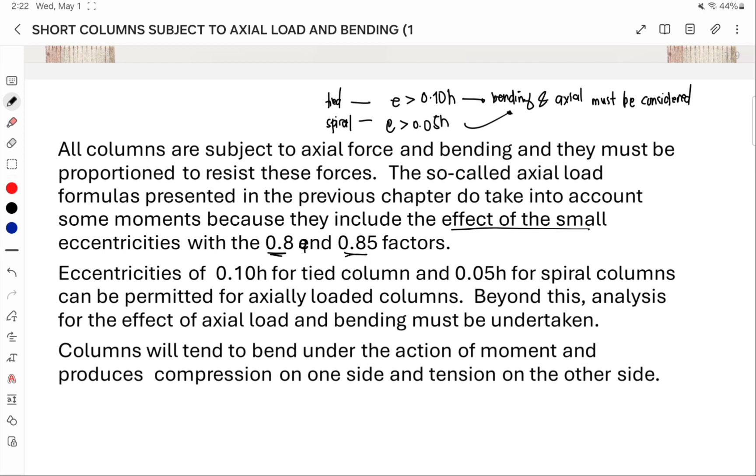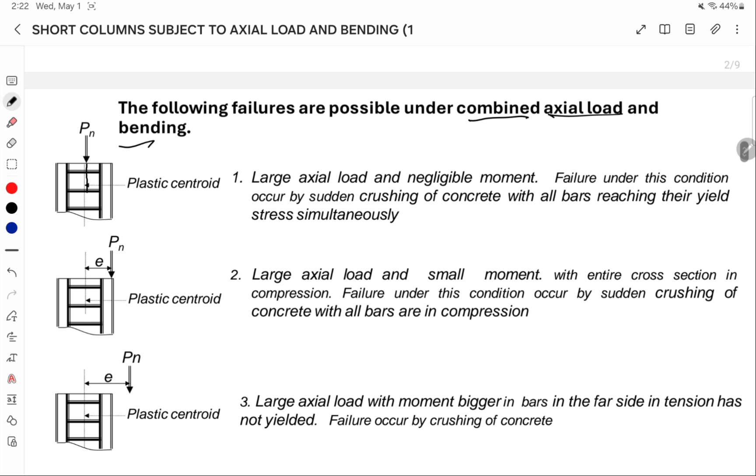The following failures are possible under combined axial load and bending. First, large axial load and negligible moment — this can happen when your PN acts only on this small part, close to the plastic centroid. So that's the possible failure for this member.

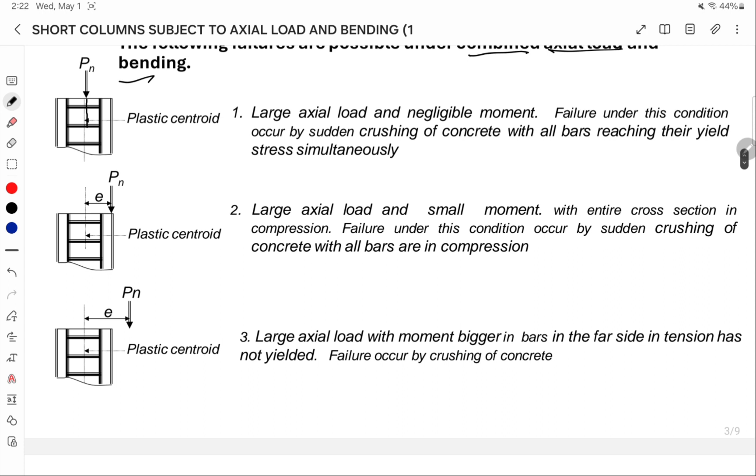We also have large axial load and small moment. And then we also have large axial load with moment bigger, where bars on the far side in tension have not yielded — failure occurs by crushing of the concrete.

Fourth, balanced loading condition, wherein the tensile side yields at the same time that concrete crushes at 0.85 FC prime. Meaning the stress Fy and the yielding of the concrete happen simultaneously with the yielding of the steel — similar to what happens in flexure for beams.

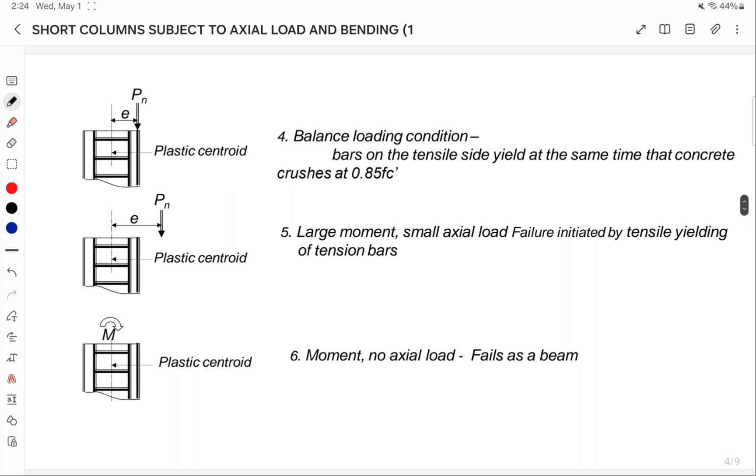We also have large moment but small axial load — failure initiated by tensile yielding of tension bars, and with moment but no axial load, it fails like a beam. Since beams are mostly subject to bending or moment, they always yield that way. Unlike columns, where mostly the load carried is axial load, moments are rare unless there's eccentricity.

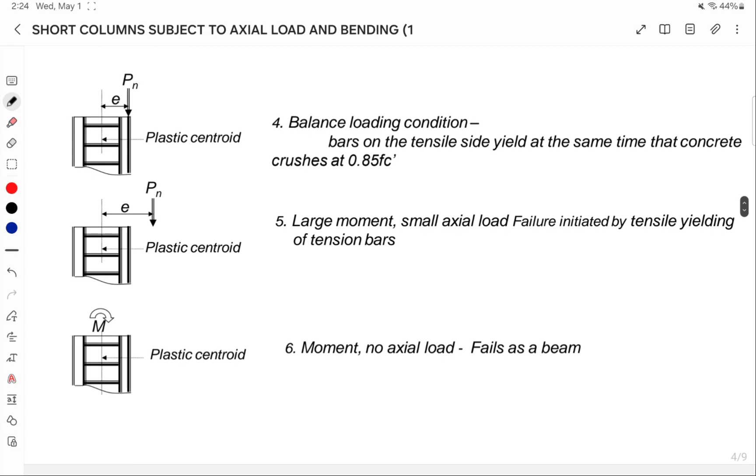So, balance loading condition: balanced loading occurs when the tension steel just reaches its yield strain as the concrete is strained to 0.003. Meaning, if this is our plastic centroid, when we draw the strain diagram here...

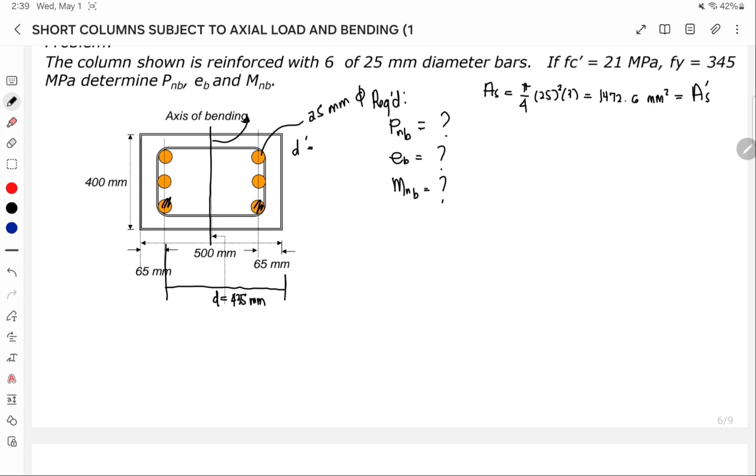It is also equivalent to As prime. So we have D, this is D prime. So D prime is equivalent to 65 mm, we'll use this later. Since we need to find the value of Pn in the balance condition, the eccentricity, and the moment in the balance condition.

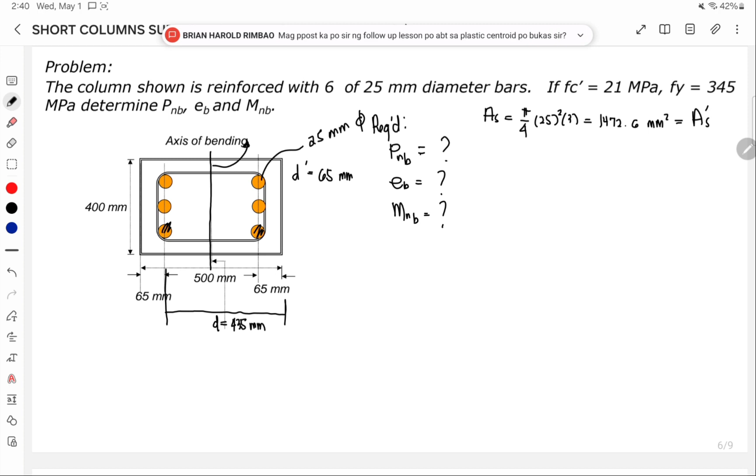So we'll use our formulas for the balance condition. Recall the formula for C-balance. When balanced, Fs is equivalent to Fy. Let's recall this for the value of C-balance.

Same formula we'll use for C-balance. We have 600D over 600 plus Fy. And then we have a-balance equivalent to beta times C-balance. Let's compute: 600 times D, 435, and then 600 plus 345. This is equivalent to 276.19 mm.

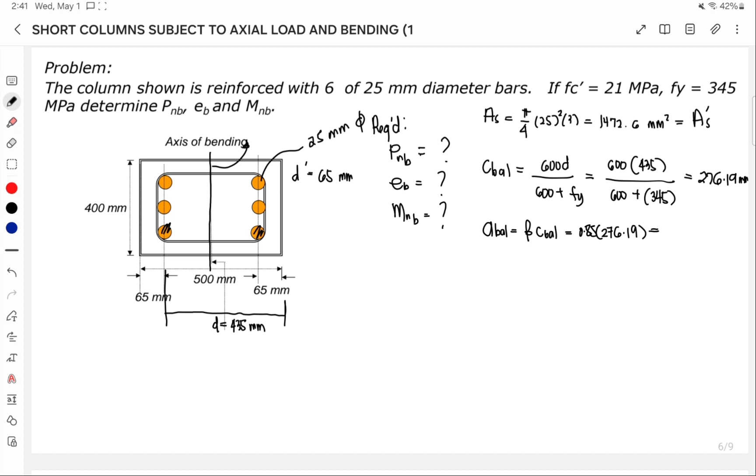For the a-balance, we have 0.85 times 276.19, so the value is equivalent to 234. Please store this value so we get the exact value. 761 mm.

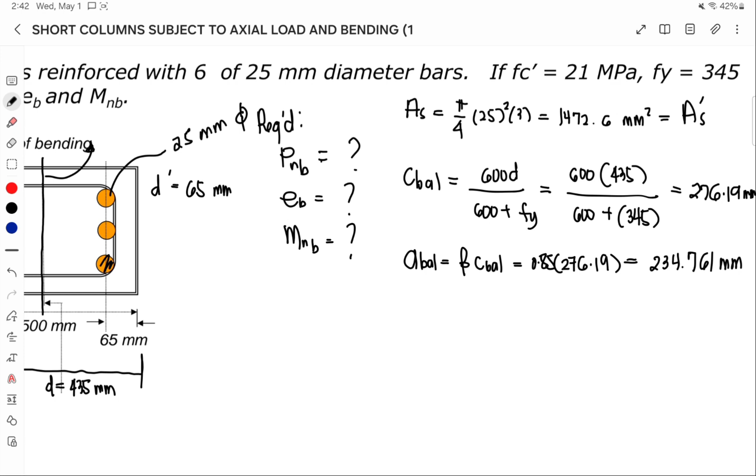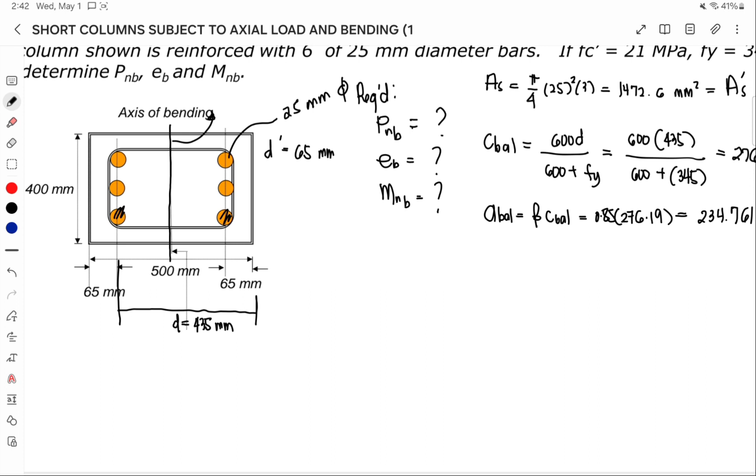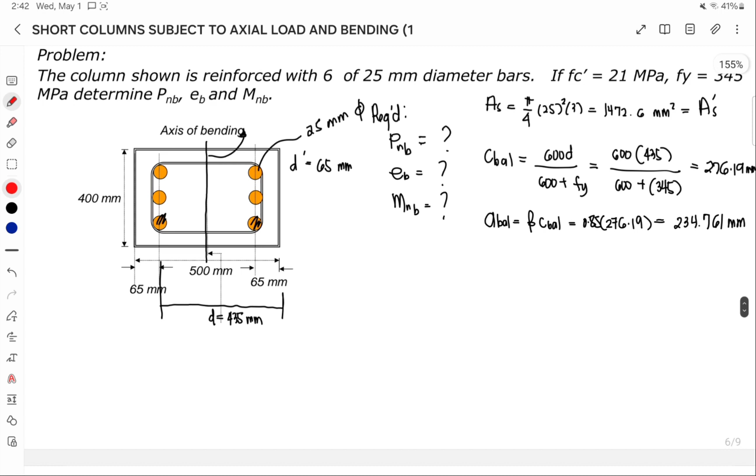Now where will we use this? In the balance condition. To understand how to solve for the e-balance or eccentricity, and the Pn for the balance condition, we can draw the strain diagram. Let's write the values of the loads acting on our section. First, let's draw the load diagram.

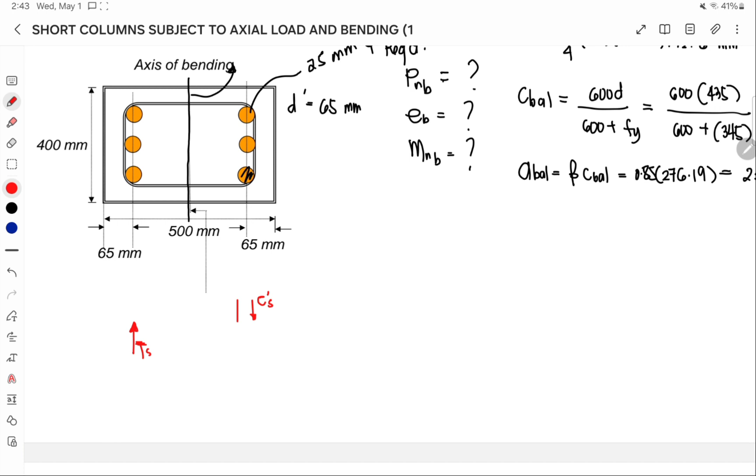We have tension in the steel bar, we call this TS, the tension at the steel bar. Then we also have downward here, CS prime, or the compression of the steel bar. And somewhere here, we have CC, or the force of the concrete. That's how it will look.

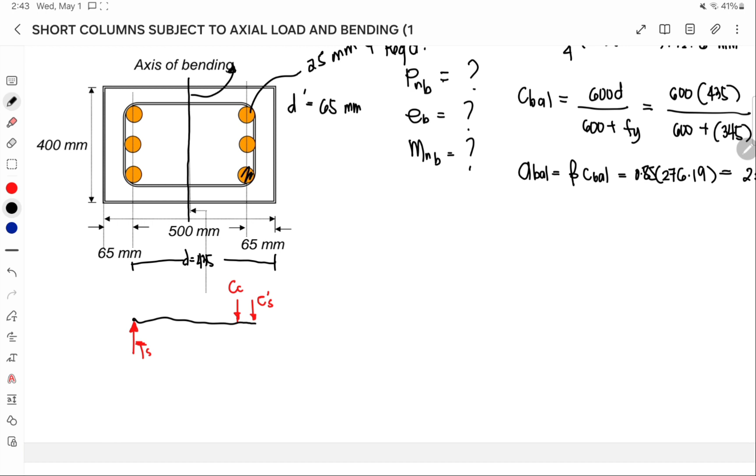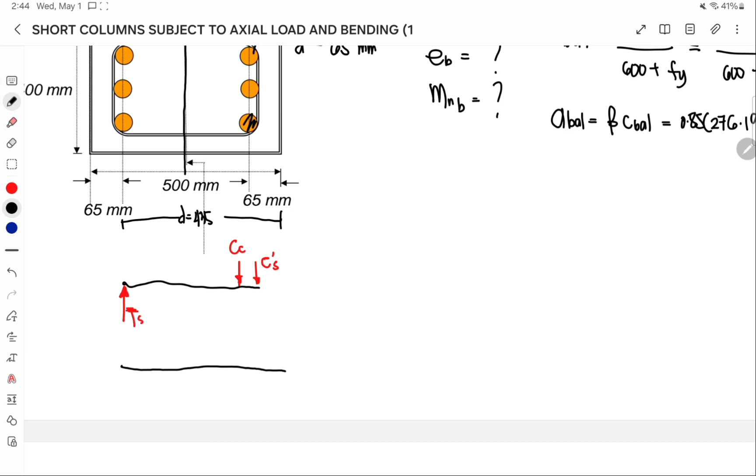Now let's draw the strain diagram, here's how it turns out. We have a line up to the outermost fiber. Then let's have the value of C-balance, 276. Half of this is 250... 50. This means our C-balance goes beyond the center, or the plastic centroid, somewhat here. So let's draw here, like this, since this is where the centroid is.

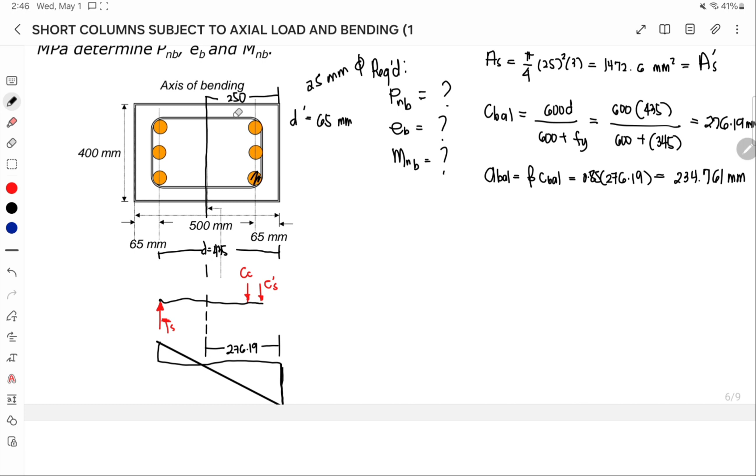Okay, that's good now. So these forces, TS, CC, and CS, you need to solve for these forces, wherein force is just equivalent to stress times area.

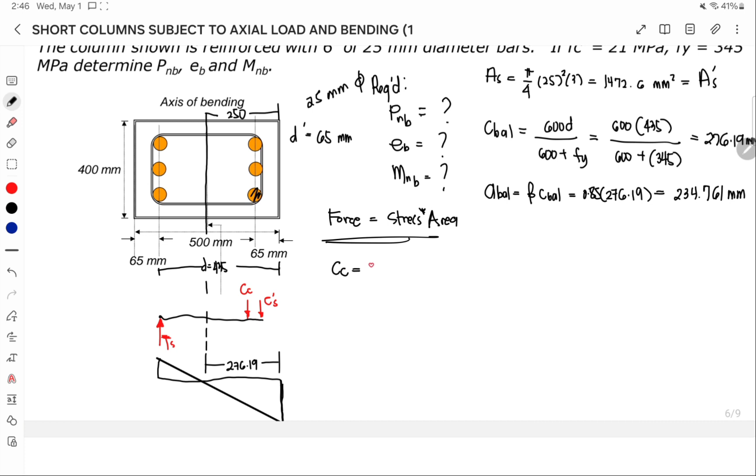By statics, let's start with CC. We have the stress of the concrete, 0.85 FC prime, times the area of the concrete, where the area of the compression concrete is just A times B. Suppose AB is 234, less than... let's say this is the part here, this is A, this is AB, and this is 400, meaning we have AB times 400.

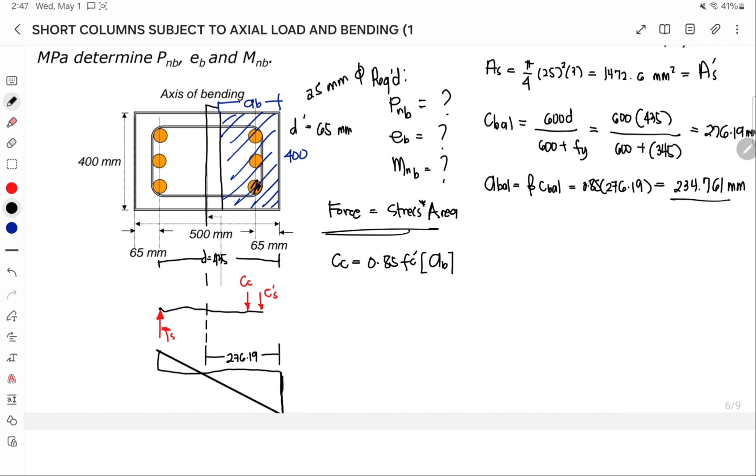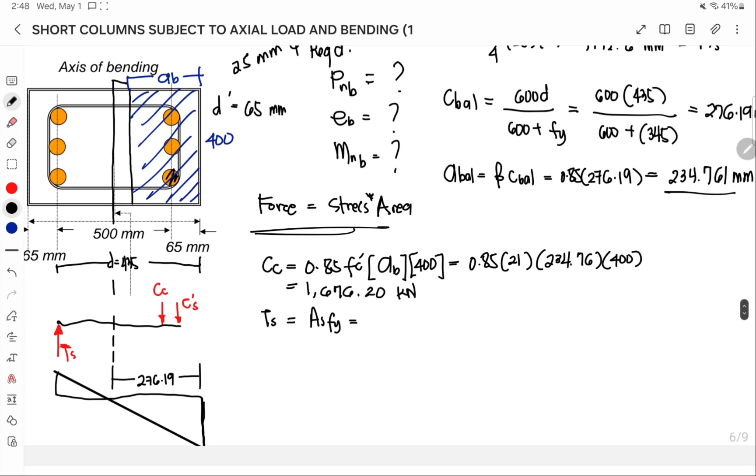So CC is equivalent to: we have 0.85, 21, AB 234.76 times 400. So the value of CC is equivalent to 1,676.2 kilonewtons. For TS and CS, it's the same, since we assume the tension steel yields at failure, and the compression steel also yields at failure. So we have AS times Fy equivalent to the area, 1472.6 times Fy, 345, which is equivalent to 508.054 kilonewton. Please store this value.

And this is also equal to CS prime.

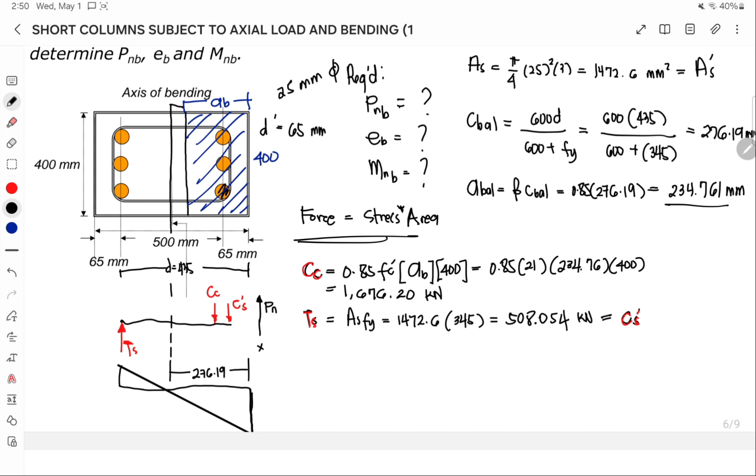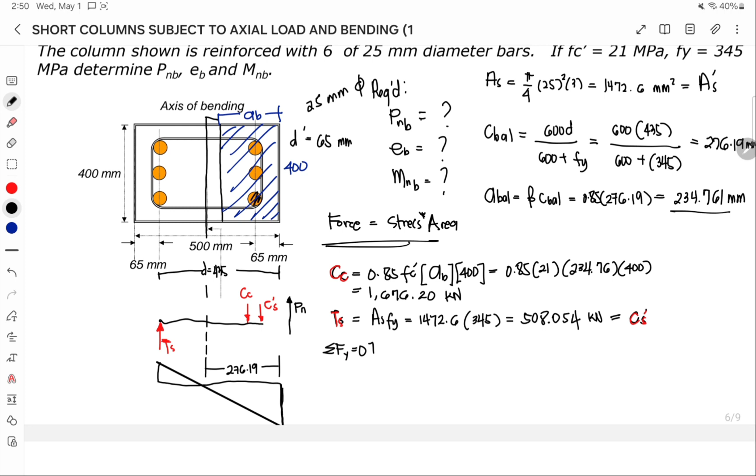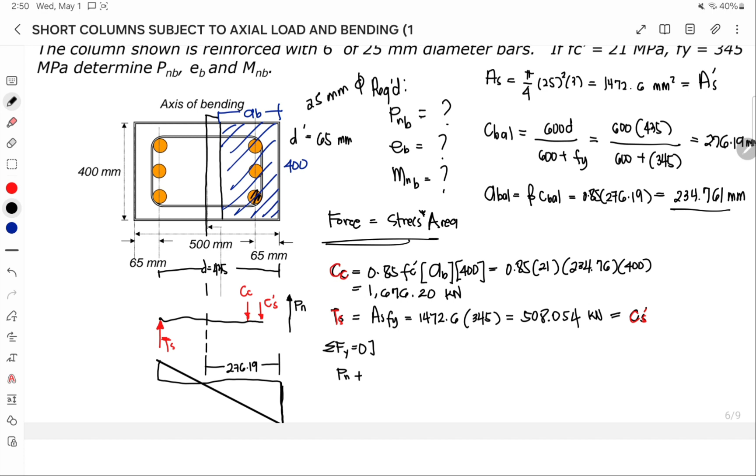Or first, to solve for Pn, we need to do summation of forces vertical. This is the procedure to follow: first compute C-balance, then compute the forces, then compute the value of Pn, where summation of forces vertical gives Pn plus TS is equal to CC plus CS prime.

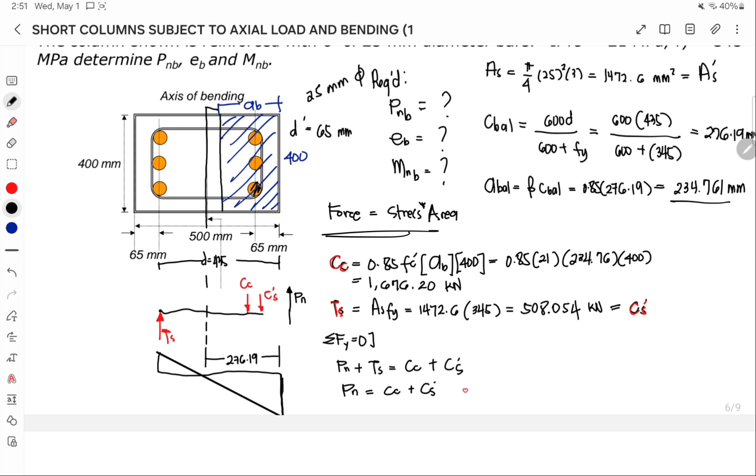PN is equivalent to CC plus CS prime minus TS. Since TS and CS prime are equal, this becomes 0. So the value of PN is just equivalent to the value of CC, 1,676.2 kilonewton. This is the answer, or PNB.

We already solved one. Now for the value of EB, or the eccentricity. The eccentricity is just the distance of the PN up to the plastic centroid. That's the definition of eccentricity.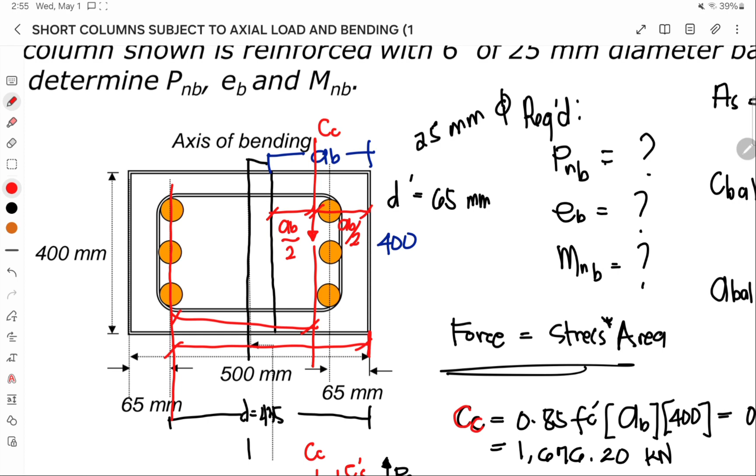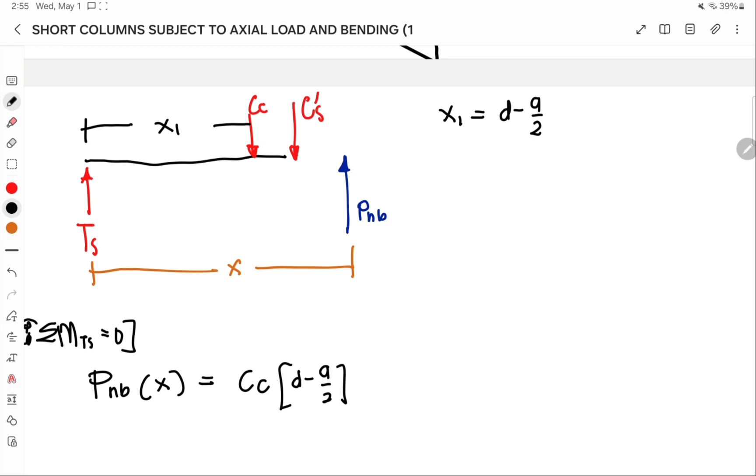Now you have X1, let's place it here: D minus A over 2, where A is the AB we computed. And then X2 - this one is for CS prime. Let me erase this again.

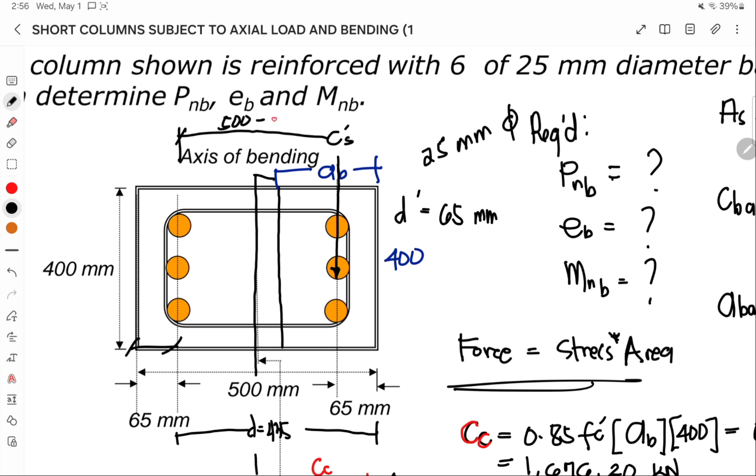This acts at the centroid of the compression bars, S prime. The distance here is just 500, the total height minus two times 65, meaning 2 times 65. So in terms of formula: X2 is H minus 2 D prime, where H is total height and 2 D prime follows.

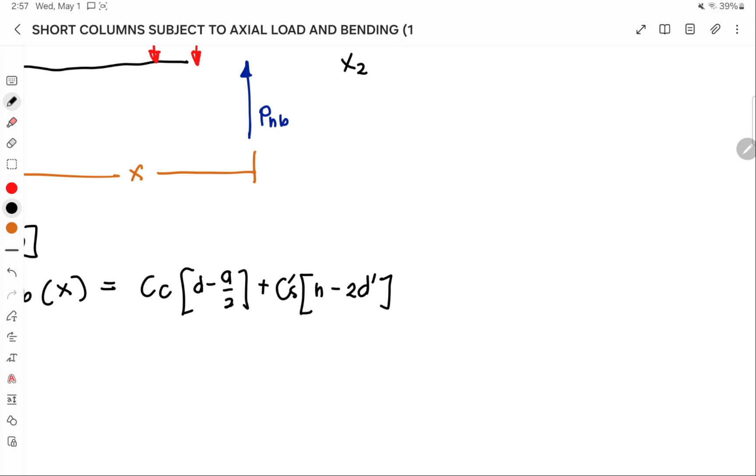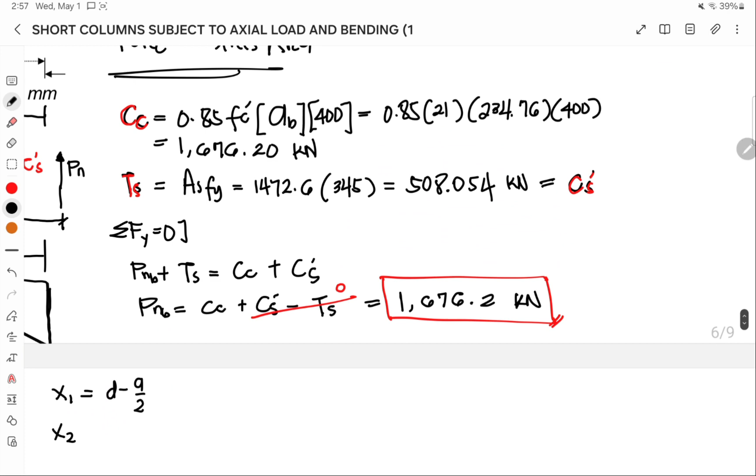Solving: PNB, 1676.2 times X, equals CC the same, 1676.2 times 435 minus A over 2, where A is 234.761, over 2, plus CS prime which is 508.054, times 500.

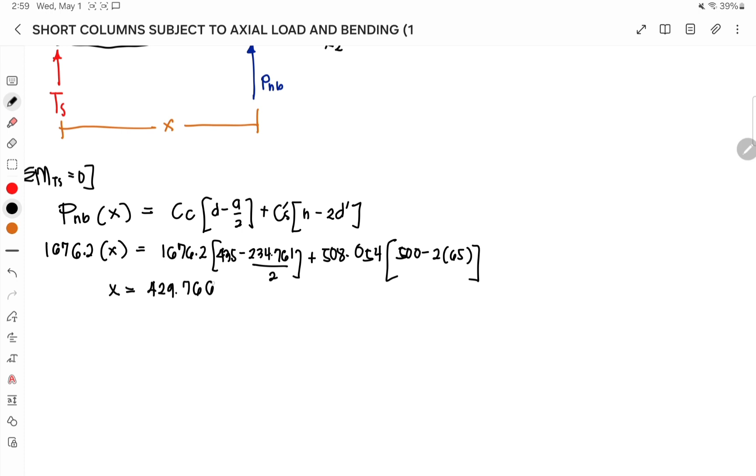Minus two times 65. So the value of X here is equivalent to 429.766 mm. Now you have X.

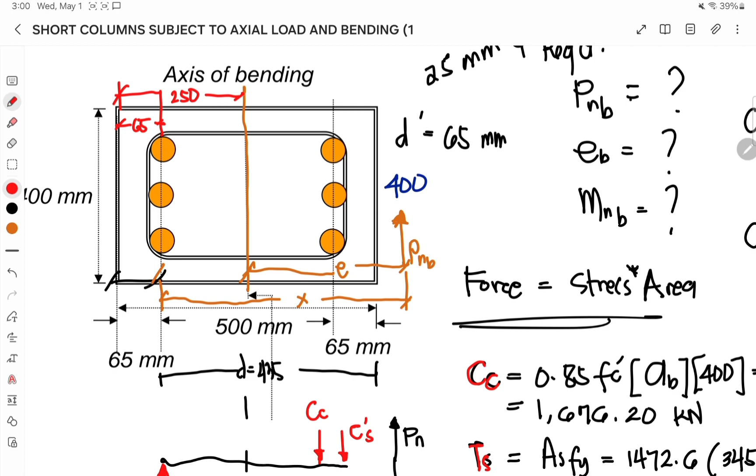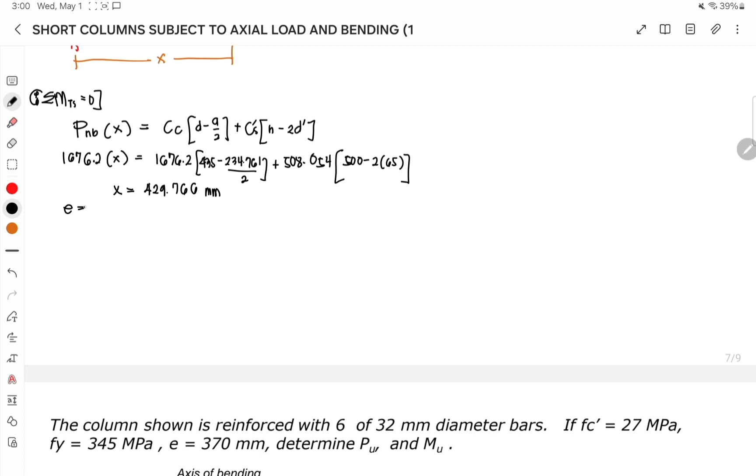This is just half, which is 250, meaning 250 minus this 65. What remains is this unknown. So that means our X, our E, is equal to X minus 250, half of 500, minus 65.

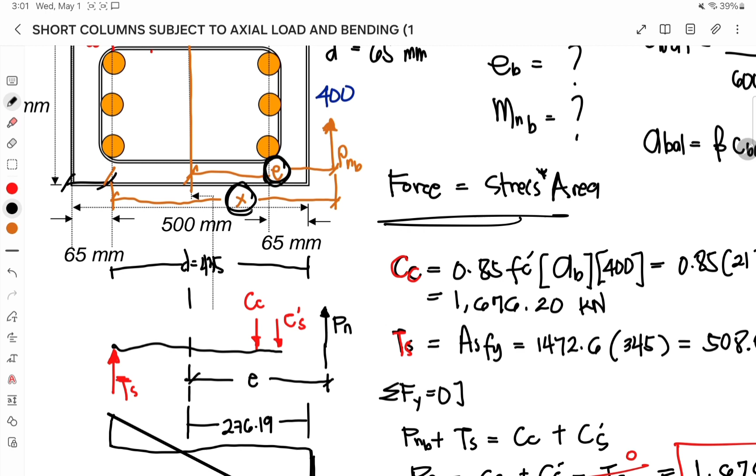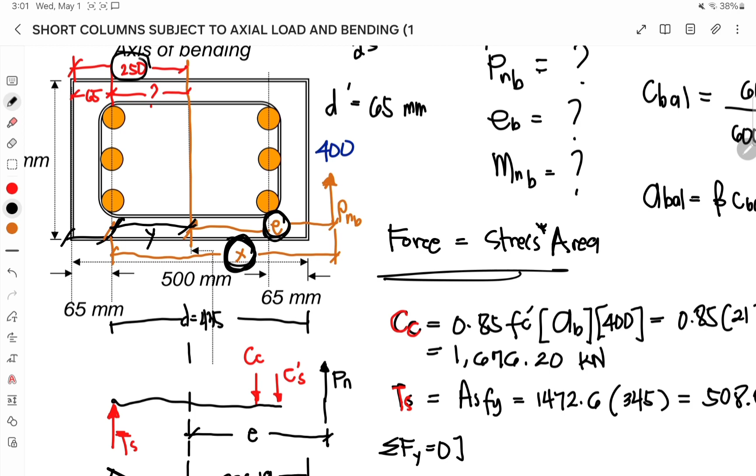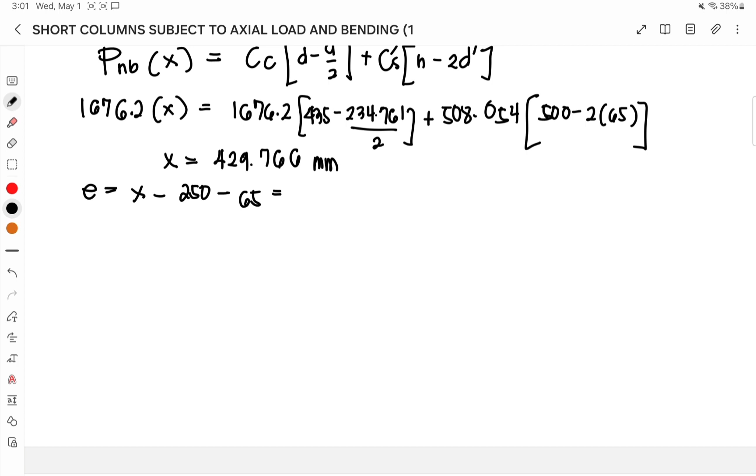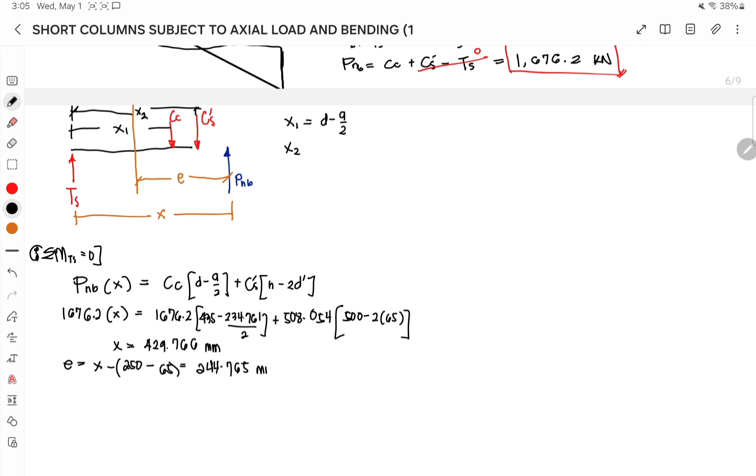That's why it's like that: 250 minus 65, which is equivalent to... this is actually the parenthesis already. So we have the value of 244.765 mm. That's the eccentricity at the balance condition.

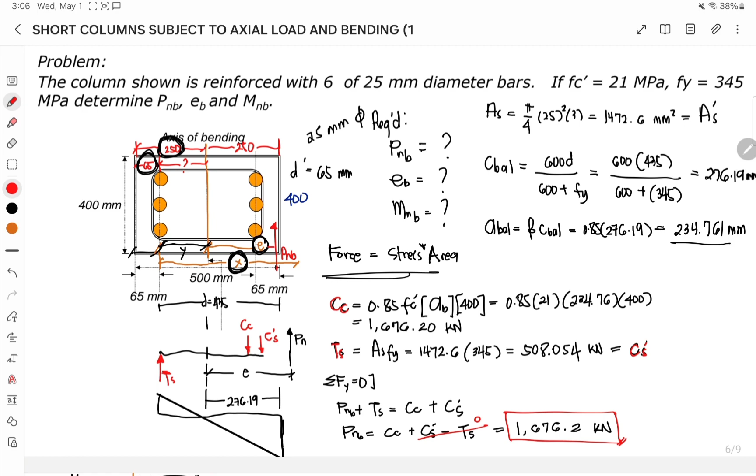PNB. Next, we have the moment, where our moment is just PNB times the eccentricity at B. No hassle there.

1676.2 times 244.76, you get the value of 410.276 kilonewton-meter. Final answer.